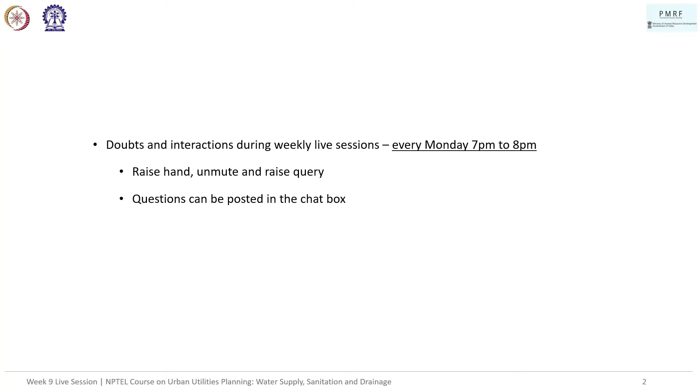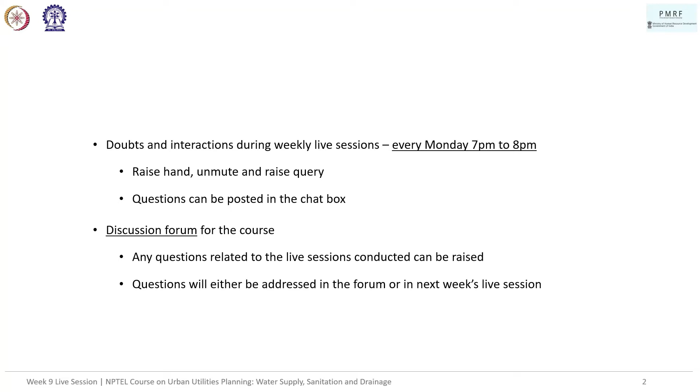In this course, we essentially have two means of interaction. One is the doubt clearing session, as well as problem solving session, every Monday, 7 p.m. to 8 p.m. Essentially, we look at the solutions for a few problems, and once each problem has been discussed, you can raise your hand, unmute, and raise your query. Questions can also be posted in the chat box. We also have a discussion forum for the course. Any questions related to the live session, also related to the general lectures, can be raised there. They'll be answered in due course of time.

So, week 9 majorly delved into sewer design, and a short recap. The first lecture dealt with the design of sewers. Next two lectures dealt with runoff estimation, and the last two lectures of the week with sewerage network design. So essentially, we saw that sewer design depends on both sewage output from households, as well as stormwater runoff, especially in case of combined sewer systems. Which is why we are looking at runoff estimation as well.

In this live session, we'll be looking at a few of the assignment questions from the previous run of the course. There'll be both theoretical and numerical questions. One of the numericals has a slight discrepancy from what was taught and what has been presented. So, right now, I will be presenting the solution that has been suggested by the NPTEL team. However, for that particular numerical, I will either get back to you in the next live session on whether the answer suggested by them is correct or faulty, or there might be a post in the discussion forum regarding the same. Right. So let's move into the lectures.

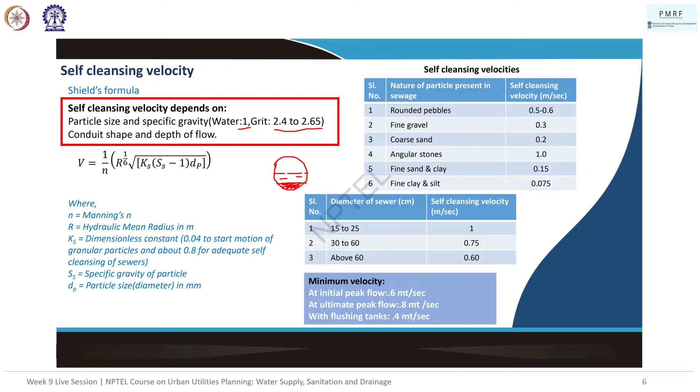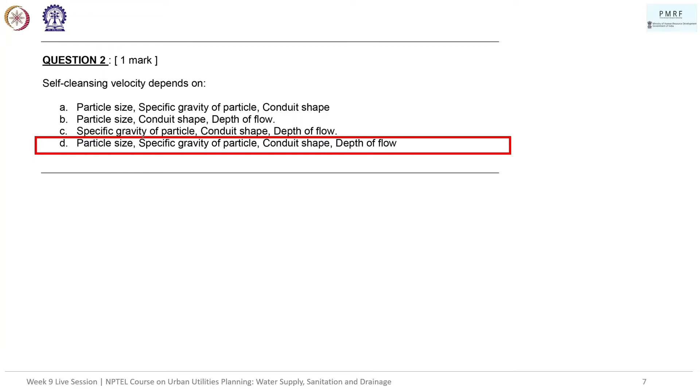Conduit shape, essentially, the cross section comes into play, right? And the depth of flow. So how much water typically flows through the sewer is also important for calculating this value, right? So the answer is D. Moving on to the next question.

So this is a numerical problem. Consider the following data of sewer. The sewer is laid at 1 in 600 slope. The diameter of the sewer is 150 centimeters. Assume n is equal to 0.015 in Manning's formula, and that the sewer is running half full. First of all, I would like to note here, in all of our lectures, the slides have the small n, not capital N, just a small thing to note so that there is no confusion. And we are supposed to be answering the following questions based on the above data.

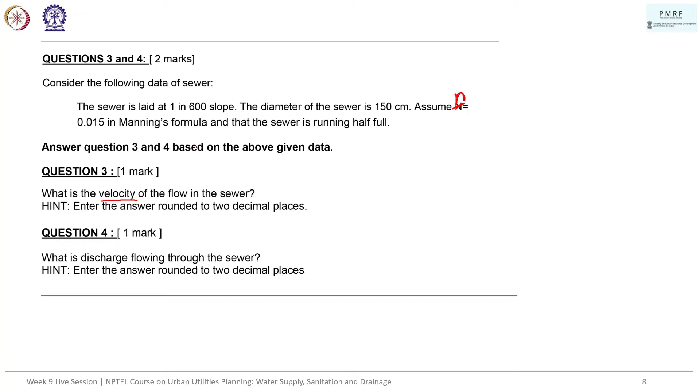So we'll be needing three values. Okay, we have one answer, 1.4. We'll work out the problem, Mr. Rahul. We'll see what the answer comes out to be. And thank you for working on it.

So n is the Manning's coefficient, or the Manning's rugosity coefficient. R is the hydraulic radius, or the hydraulic mean depth of pipe in meters. If you remember, hydraulic mean depth is the area of flow. So if this is a pipe, and this is the water flowing, right? This is the wetted perimeter, right? And this area is the area of flow, as in how much of the pipe is covered cross-sectionally when there is sewage flowing through. So the hydraulic radius or hydraulic mean depth of pipe is essentially this area of flow divided by the wetted perimeter. So it's wetted. I've seen a few students take it as weighted perimeter, which is why I'm stressing that how much of the perimeter gets wet is the basis, right?

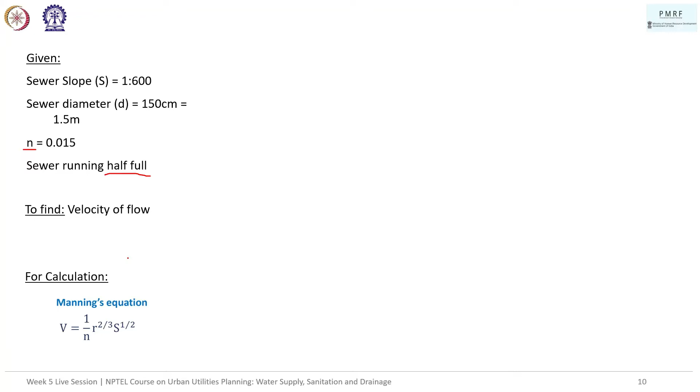So what are we given? We're given that the sewer slope is 1 is to 600, which will be taken up as 1 divided by 600. Sewer diameter is 150 centimeters, which is equal to 1.5 meters. N value, as I had said, we are going to take as small n, because that's what's given in the lecture, is 0.015, and the sewer is running half full. Right, what are we supposed to find? We are supposed to be finding the velocity of flow, and we'll be using Manning's equation for calculation. So the solution is pretty straightforward.

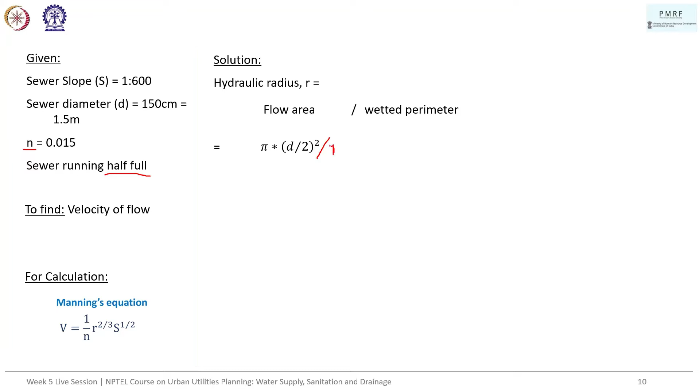We first calculate the hydraulic radius, which is equal to flow area divided by wetted perimeter, right? So the flow area is, since it's half, actually there has to be another half here. Half of the circle is being used, so we'll be using, sorry, that is missing here, and divided by the wetted perimeter. The wetted perimeter is taken as half. So usually the perimeter of a circle is 2 pi r, right? But we are taking here pi r, r is equal to d by 2, right? And since half the sewer pipe is full, we'll be taking half of the flow area. So simplifying this, the answer comes out to be d by 2, right? And the answer is 0.75, if I'm not wrong.

So let's substitute the values in Manning's equation. It turns out to be 1 divided by n into R power 2 by 3 and S power 1 by 2. And substituting the values, n is 0.015 as given in the question. R is 0.75 to the power 2 by 3 and S is 1 divided by 600 power 1 by 2. The answer actually comes out to be 2.25 meters per second. Now that I think about it, I have a suspicion that they probably did not take this divided by 2 into consideration. So these are solutions provided by the NPTEL team, right?

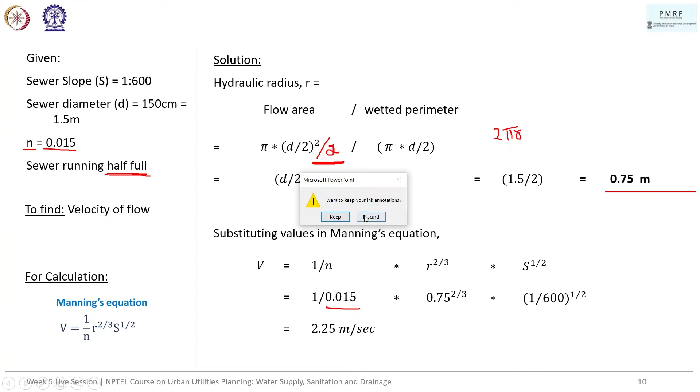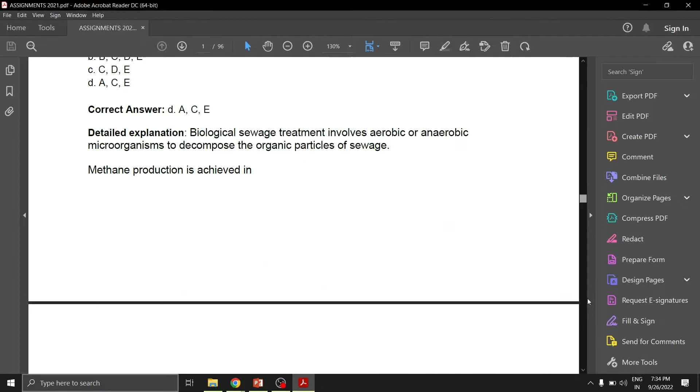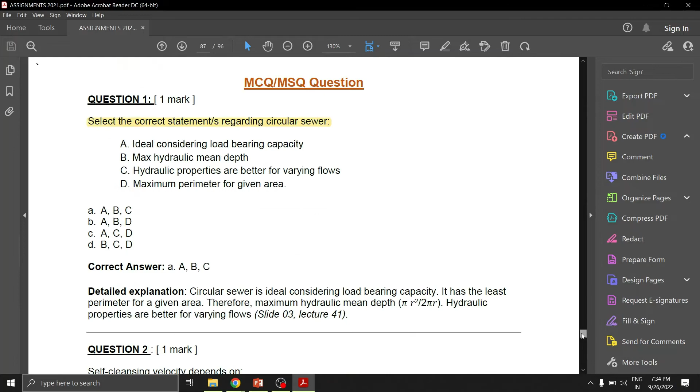So, yes, ma'am. Actually, hydraulic radius is d by 4, right? Yeah, I'm wondering. One second. Could you please check? I'll just check the previous year's solutions. Even from lectures, you can find. I told you that it's supposed to be d by 4, which is why I'm wondering if they've given the right answer. Okay. One second.

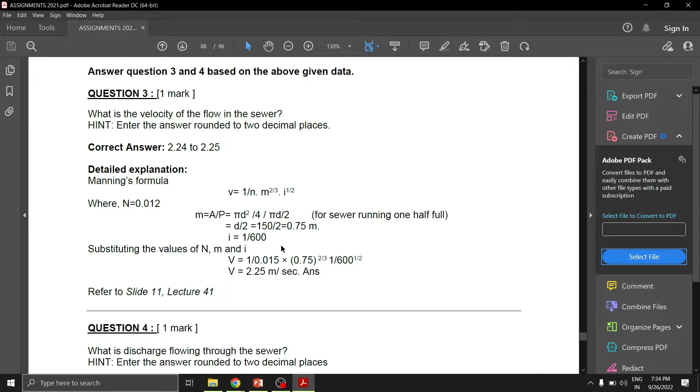It's actually d by 4. They've made a mistake, right? So, which means the answer here will also be different. Let's directly calculate instead of me taking the answers from them. So here it will be another divided by 2, right? Because this is the area pi r square divided by 2. So we'll have d by 8 and here d by 2, so it will be d by 4. Which means our radius will also subsequently change, right? So 1.5 divided by 4 gives us 0.375. So substituting this value and not the former value, right?

So actually, let me do it in Excel. It's easier for me as well. It's 1 divided by 0.015, then 0.375 to the power 2 by 3.

And this is 1 divided by 600 to the power 1/2, right? And we shall be multiplying. Yes, so the answer is actually 1.4153. Yes, so Mr. Rahul, you are correct, and I guess I'll have to let the NPTEL team know, right? So that will be our answer.

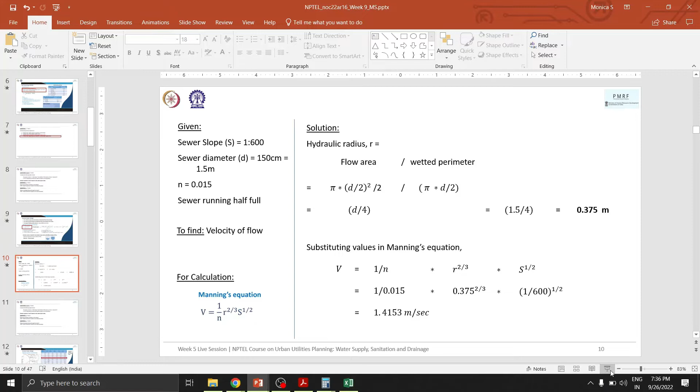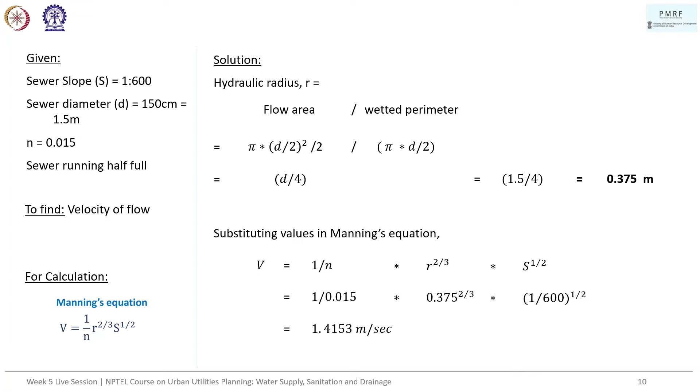Is this all right now, ma'am? Yeah. Okay. I have not checked the solution, but process-wise, this has to be the answer, and I'm glad that Mr. Rahul also has the same answer. At least the process is right. This is the hydraulic radius. It's not d by 2. So I'll request the NPTEL team to also change it in the original solution provided.

Alright? So moving on to the second, what is the discharge flowing through the sewers? We'll have to again probably modify it. When we are taking the discharge through the sewers, because the flow is half, we can't directly assume that it's half. Matlab, if the flow is say 3/4 of the sewer, we can't assume that the flow will actually be 3/4 of the value of the total flow, right? If you remember, proportionate discharge could be higher and velocity could be higher than the velocity at full flow, which is why here we are just cross checking for the halfway point. It so happens to be half, right? When the sewer is half full, the proportion is also half of the flow, right?

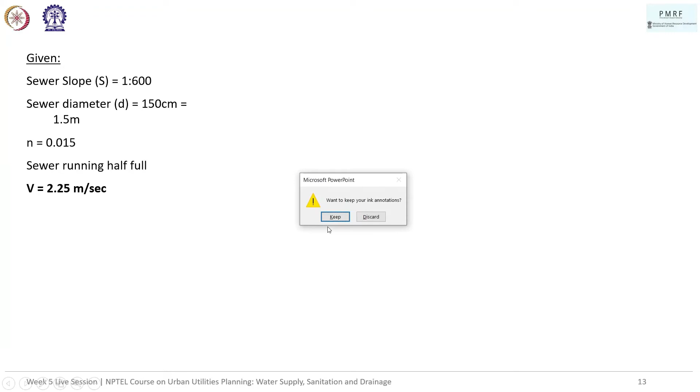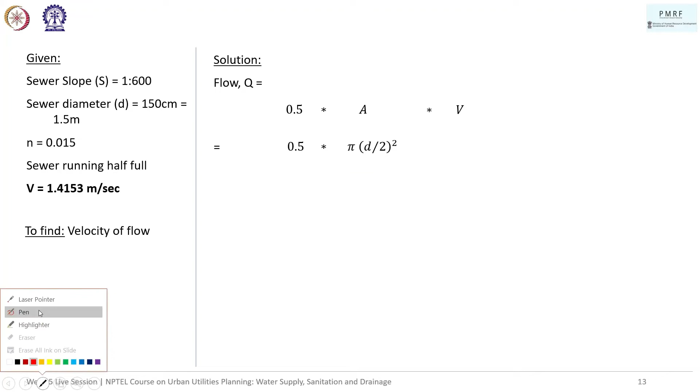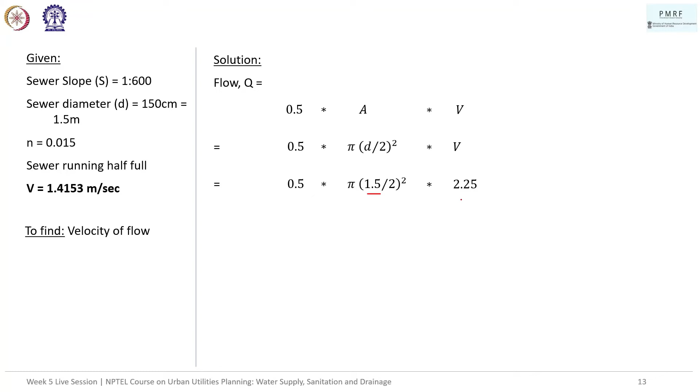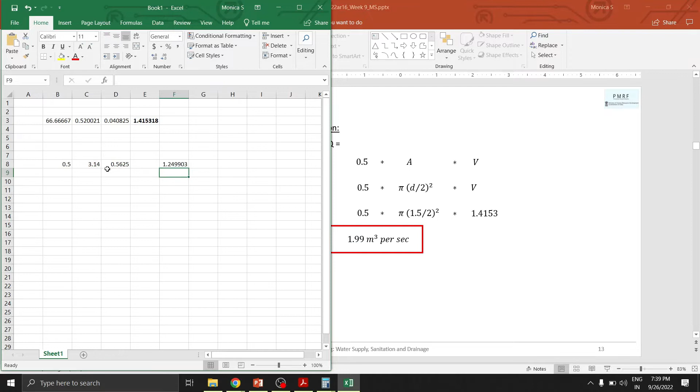Therefore, here again it is 1.4153 if I'm not wrong. Right, the calculation will vary. Let's solve it together. So the flow will be 0.5 times A into V. So that will be 0.5 times pi d by 2 square into V. So there will be 0.5 into the d is 1.5, but V value is 1.4153, right? So let's calculate this as well. So that will be 0.5 into 3.14 into 0.75 square into 1.4. So our answer will be 1.2499. So 1.25 essentially, not 1.99. Right. So I'll ask the team as well to modify the solution.

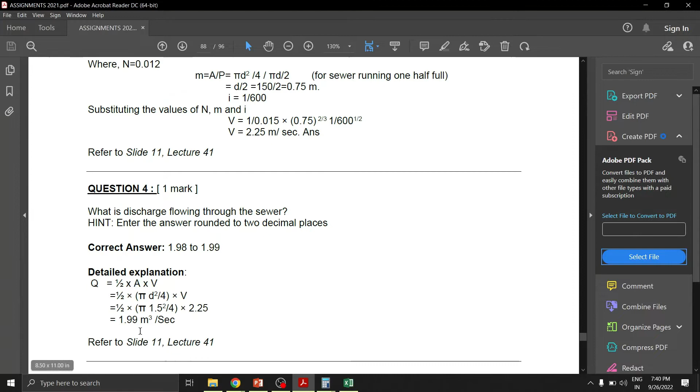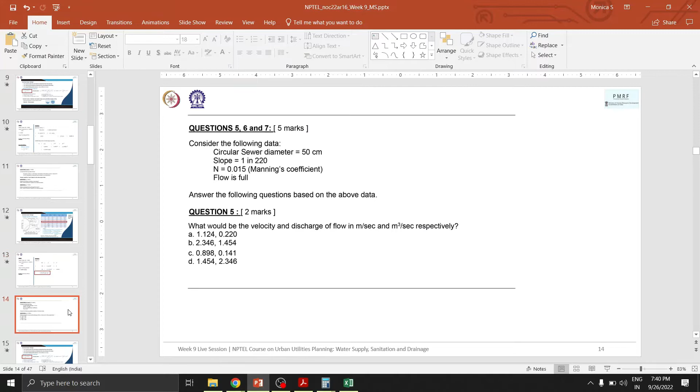So these are the two values, right? The original solution that has been suggested is 1.99, but that's not the answer. Please take note of this. Any queries in the formula or anything? No. All right, it's a straightforward substitution, except the wetted perimeter calculation was wrong here. I'm sorry about that. So moving on to the next question.

This is again a set of numericals based on the values given. Right. So consider the following data. Circular sewer diameter is 50 centimeters. Slope is 1 in 220. So that is 1 is to 220, or 1 divided by 220. And the n value, again, it's given as capital N, whereas all our formulae use small n. Please be mindful. Which is the Manning's coefficient is 0.015, and the flow is considered to be full this time, right? So, and we're supposed to be solving three questions based on this data.

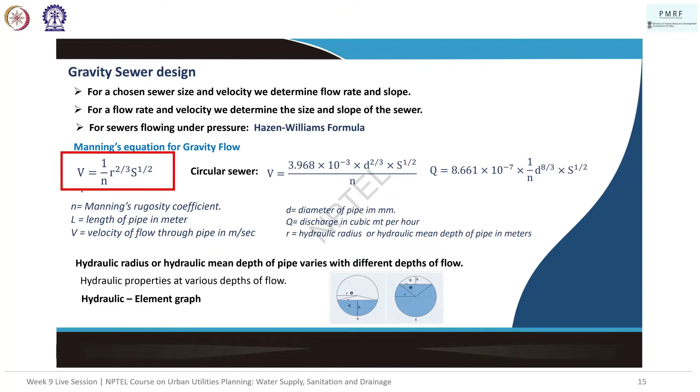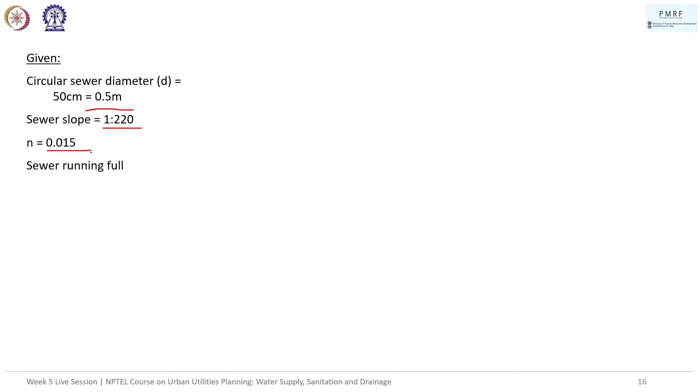First question is, what would be the velocity and discharge of flow in meter per second and meter cube per second respectively. So this is again using the same process. We'll be using Manning's equation for gravity flow, right? So this is a given data. We have a diameter of 0.5 meters, sewer slope is 1 is to 220, n is 0.015, and sewer is running full. We need to find the velocity and discharge of full flow, right? So using the same process that we used before, this time I guess the area will be correct, right? So here it's pi r square, and divided by wetted perimeter is 2 into pi into d by 2.

So however again d by 4, yeah, here the hydraulic radius is d by 4, right? So thus the diameter given is 0.5 meters divided by 4, and that gives us a hydraulic radius of 0.125 meters, right? So now substitute the value in Manning's equation. That gives us 1 by n into r power 2 by 3 into s power 1 by 2. So the n value we substitute 0.015 into r value is 0.125 as we have just calculated, and s value is 1 by 220, and the answer turns out to be 1.124 meters per second. I'll just check now that the answers seem to be very shaky.

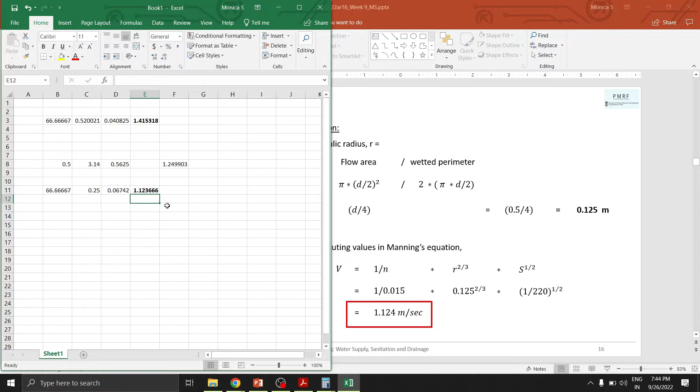So 1 divided by 0.015, this is 0.125 to the power 2 by 3, and 1 by 220 to the power. Then we multiply all of this. So the answer comes out to be 1.1236. Mr. Rahul, I don't know which value is differing for you.

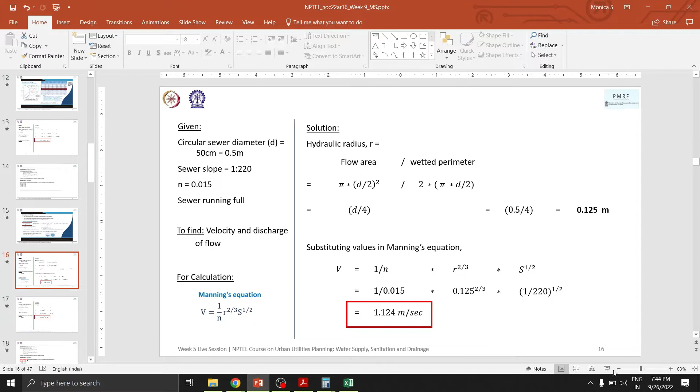You've gotten 1.116, right? Please check, and if there is a discrepancy, please let me know. Okay, decimal rounding. That's fine. Usually, even for examinations, we try to keep the intermediate values to 4 decimal points, and then round off the final value, if needed. So just keep that in mind. It shouldn't be such a big deal.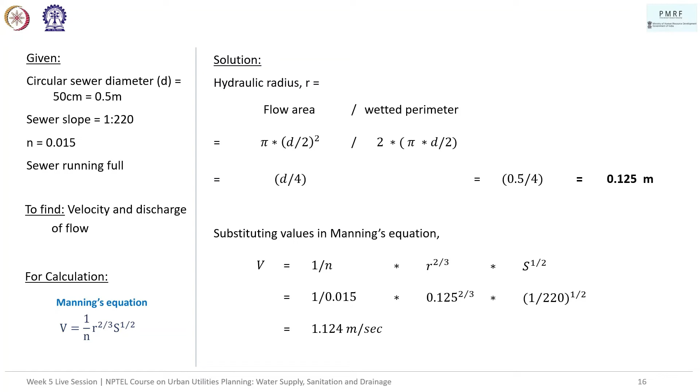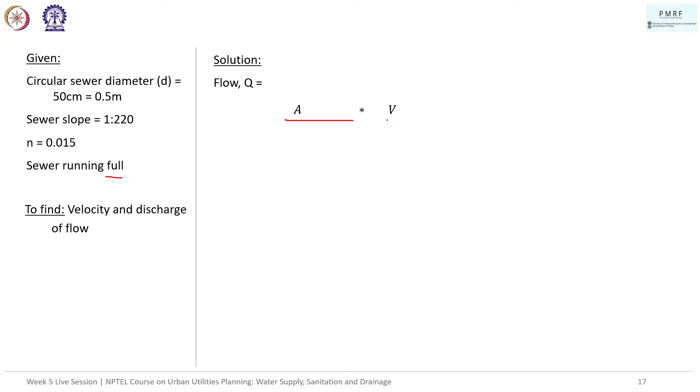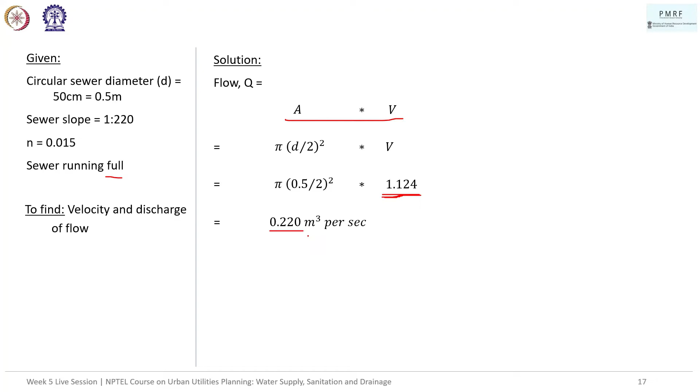So this is our answer for V, and for Q, again A into V. Since the sewer is running full, we are taking the formula for full flow, full discharge. So the area is pi times (d by 2) squared, and into V. Using the answer we got in the previous step, it turns out to be 0.22 meter cube per second. So that's our answer.

I guess you would have also selected this answer, Mr. Rahul, because it's the closest value possible. All right, so that's the solution for the first question. Here we had the value for the flow being full. However, the next question asks what would be the velocity and discharge when the same is flowing at 0.3 of its full depth.

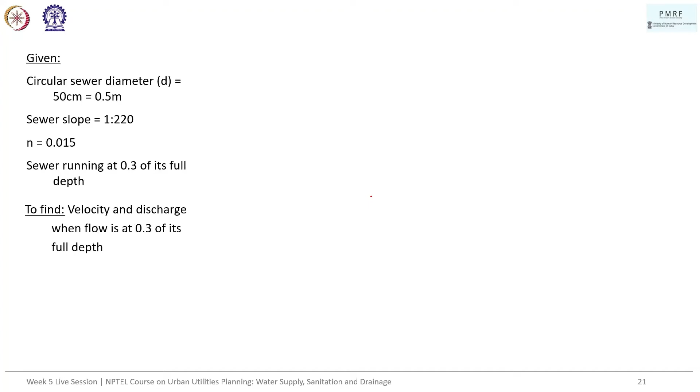Now we look at this chart and we realize that the proportionate depth we are talking about is 0.3 of full flow. So in order to calculate the velocity and the discharge, we'll be using the proportionate velocity and proportionate discharge. These are the values given, and we'll be using the values from the table. The solution: proportionate velocity is for small v, for 0.3 flow, and this is for full flow. The given number is 0.776.

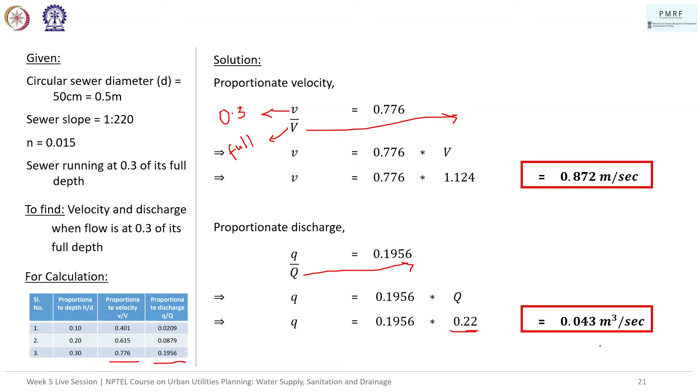That implies we cross multiply. So small v is equal to 0.776 into capital V, which is 0.776 into 1.124. Yes, Mr. Rahul, v by V is 0.776. So the answer turns out to be 0.872. Similarly, for proportionate discharge, q by Q is equal to 0.1956, which is again given in the table. Then we cross multiply, taking the Q value as 0.22 from the previous calculation, and the answer is 0.043 meter cube per second. The solution is B.

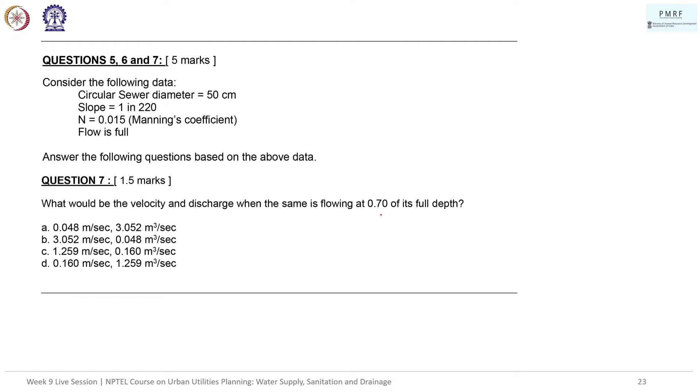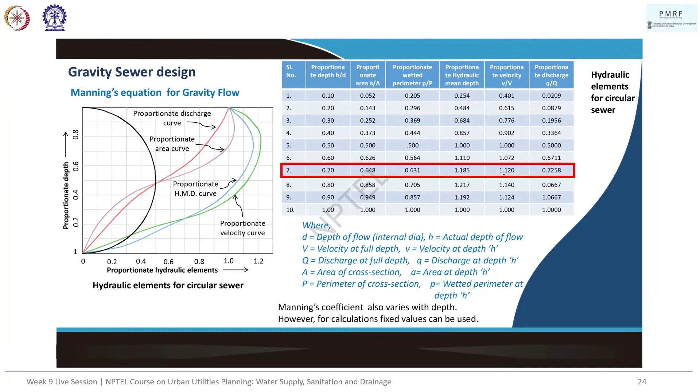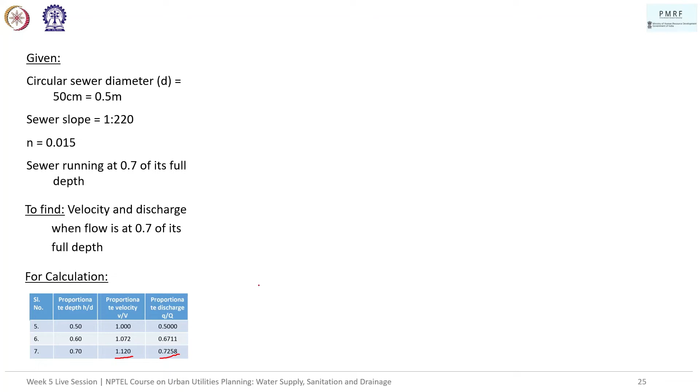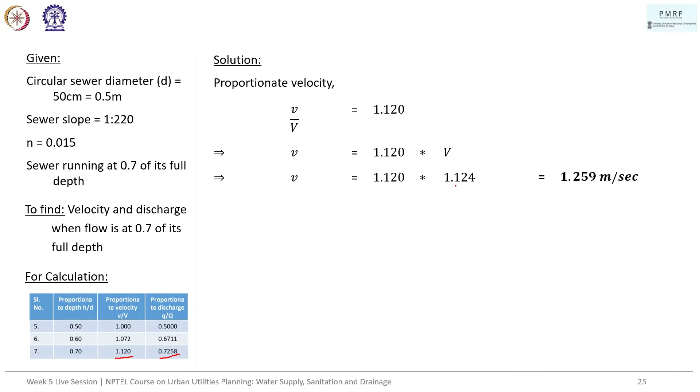Similarly, when we look at the flow at 0.7 of full depth, we take the values for 0.7 of the proportionate depth. The values turn out to be 1.12 for v by V and 0.7258 for q by Q. These values are usually given. In proportionate velocity, we do the same thing. v by V is 1.12, so v is equal to 1.12 into capital V. The capital V we had calculated to be 1.124, and the answer turns out to be 1.259.

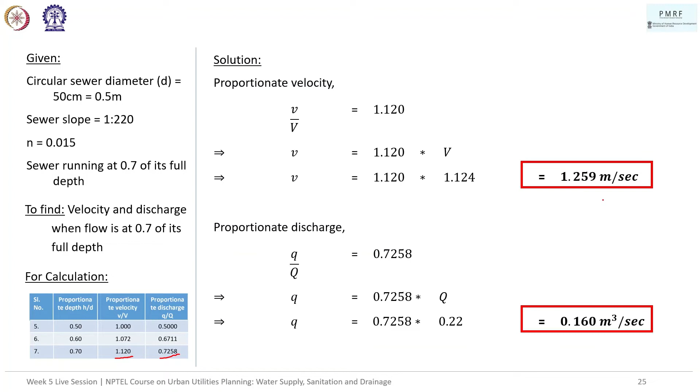For proportionate discharge again, q by Q is equal to 0.7258. So q is equal to 0.7258 into capital Q, and that turns out to be 0.160 meter cube per second. So our answer is C. Any queries in this numerical? No. All right, let's move on then.

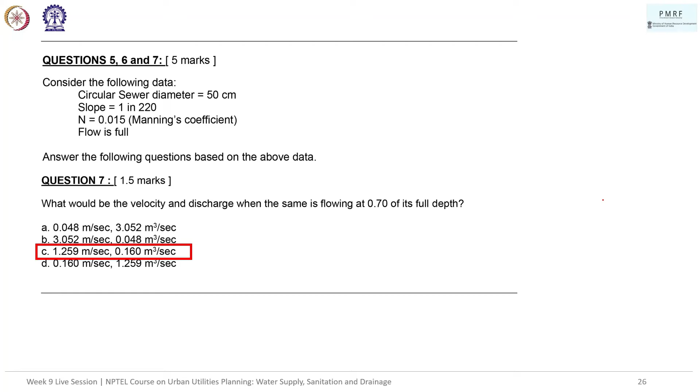Going on to a theoretical question. The dash of a storm event may be defined as the average recurrence interval between events equal to or exceeding a specified magnitude. So, any answers? The average recurrence interval between events equal to or exceeding a specified magnitude.

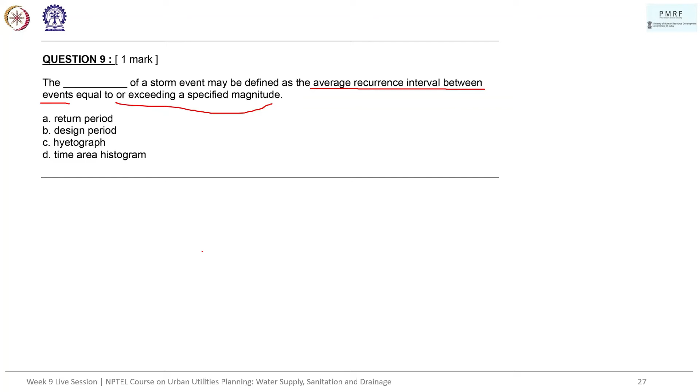So if we look at the slides, this is for the return period selection as has been mentioned in the CPHEEO manual 2019, right? So that's a direct answer from the slide. So the answer is return period. The return period of a storm event may be defined as the average recurrence interval between events, which is equal to or exceeding a specified magnitude.

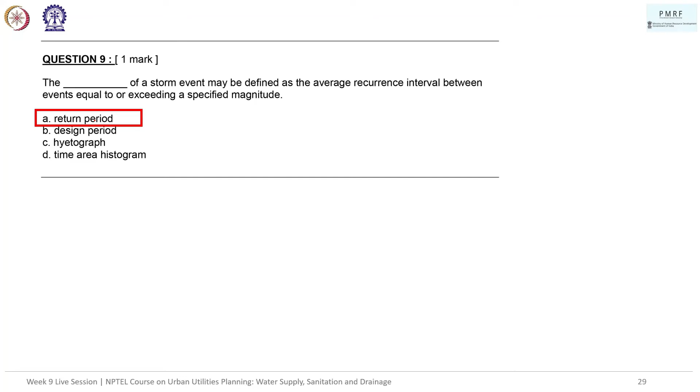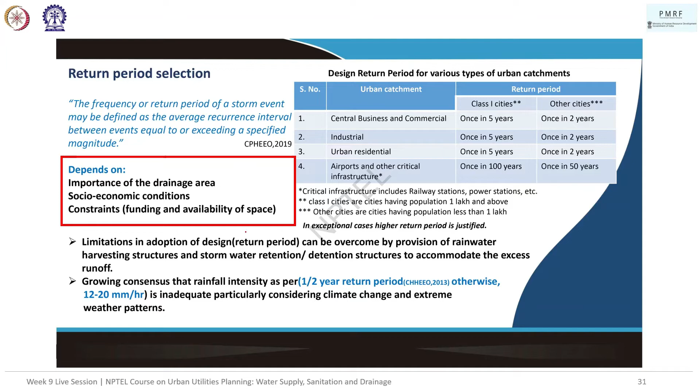Alright. So the next question. Return period selection of a storm depends on A. Importance of the drainage area, B. Socioeconomic conditions, C. Constraints, that is funding and availability of space, and D. Design period of infrastructure. This answer is again in the same slide actually. So this value depends on the importance of the drainage area, socioeconomic conditions, and constraints of funding and availability of space. Right? So again, a very direct answer. The answer is A.

Because essentially design period of infrastructure is not really going to influence the occurrence of a storm, right? The storm will occur. The infrastructure might influence how we respond to the storm or how much damage happens, right? Moving on to the next question.

So we essentially have a match the following. For inlet time, time of travel, time of concentration, and partial area effect. Any answers for inlet time or the overall answer also? Okay, let's just go on and take a look at the slides. So we first look at the time of concentration. The time of concentration has been specified as the time required for water to travel from the furthest point in the total catchment to the point of consideration, right?

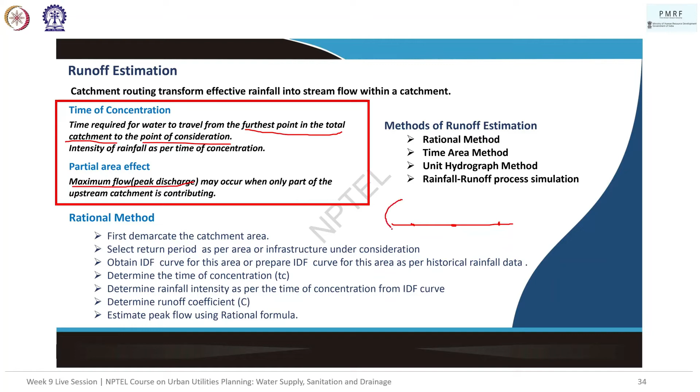So whenever there is a catchment area and there are points of inlet, right? So say this is the entire watershed and the topography permits all the water here to enter this inlet, all the water here to enter this inlet, and all the water here to enter this inlet. So we might expect, okay, for this point we'll also have water coming in through the pipe, and at this point all of the water, which is essentially all of the water from this entire catchment area, will be going through here, right? Usually we'll expect this value to be bigger than this value. However, partial area effect might result in this value being bigger than the whole catchment area. It depends on permeability and

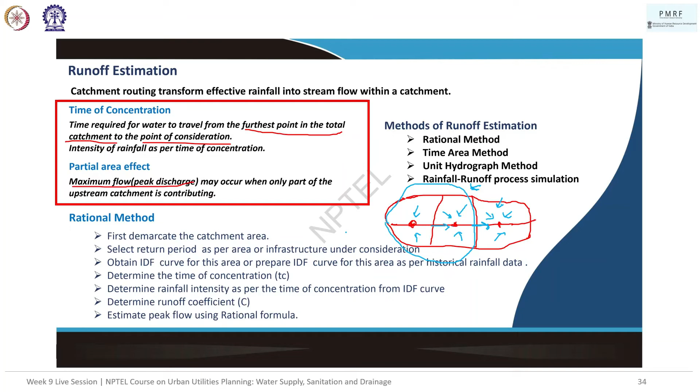etc. Right? So the next one is inlet time or surface or overland flow time, which is the time required for the rain falling on the most remote point of the tributary or catchment area to flow across the ground surface along drains or gutter to inlet of sewer. Right? And the time of travel is the time required by storm water in traveling from the uppermost inlet up to the point of concentration. So there we go. Our answer will be A. So inlet time is the time required by runoff from the most remote point to inlet of sewer, right? So Q will be 1.

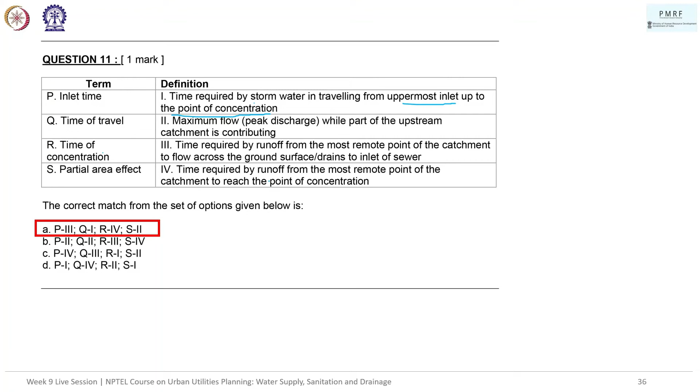Time required by storm water in traveling from uppermost inlet up to the point of concentration. Time of travel is 4. Time required by runoff from the most remote point of the catchment to reach the point of concentration is time of concentration. And partial area effect, as we said, is maximum flow while part of the upstream catchment is contributing. Any questions here? These are all definitions that need to be remembered for your exam as well. These are basic concepts that you need to know, right? Alright, moving on to the next question.

Runoff entering into the sewer depends on A. Imperviousness of the catchment, B. Shape of the drainage area, C. Duration of storm, and D. Specific yield. Any answers? We have one A. The answer is actually

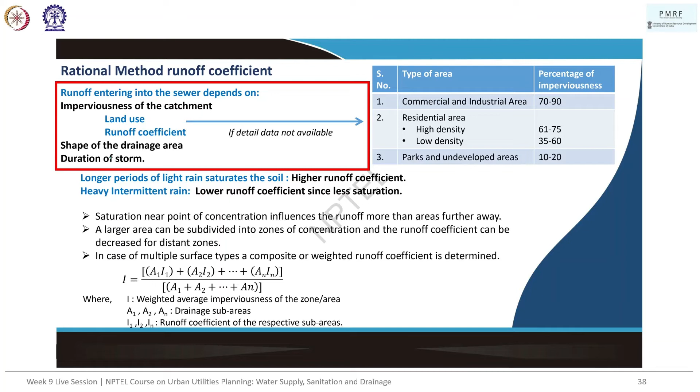Right. So we have this again directly from the lecture contents. Within the imperviousness of the catchment area, essentially these are influential points, right? You also have shape of the drainage area and duration of storm. So the answer is A. Specific yield does not really determine the runoff entering into a sewer. Right? So let's move on to the numerical. Any doubts till now? I hope not. These are all theoretical questions directly from the lecture, right?

Okay, so moving on to the last numerical. Here actually, this is the question that I was talking about, that there is a discrepancy. It looks like this is the second question where we have a discrepancy for the evening. So, determine the minimum required diameter of a circular sewer making use of the following data. Area to be served is 120 hectares. So that will be 120 into 10^4 meter square, right? Hectares to meter square. So 1 hectare is equal to 10,000 meter square. Just remember this always.

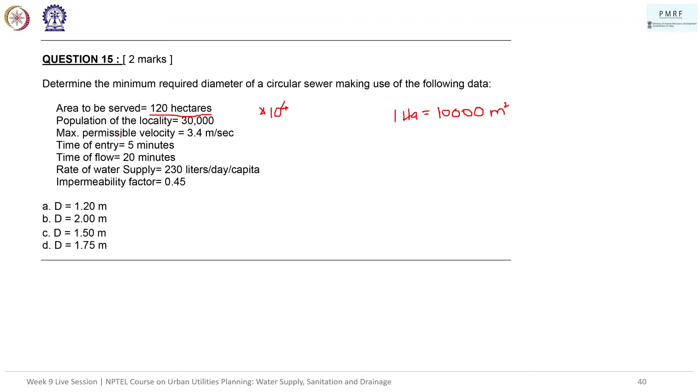Pardon my bad handwriting. The population of the locality is 30,000. Maximum permissible velocity is 3.4 meters per second. Time of entry is 5 minutes and time of flow is 20 minutes. The rate of water supply in the area is 230 liters per day per capita, so LPCD. And the impermeability factor is 0.45, right?

So one thing that we need to remember here is the time of concentration is equal to inlet time plus time of travel in the drainage system, that is time of flow. So if you look at the question, they have given it as time of flow, right?

I'm sorry about that, just ignore it. I hope you understand that's a mistake.

So these are the givens, and we need to find the minimum required diameter of the sewer, right? So for intensity calculation, we'll be using the empirical formula for rainfall intensity. First of all, let's calculate the quantity of water supply. That will include population times rate of water supply, right? So how much population is there, and the rate of water supply is given per capita.

So that will be 30,000 into 230. 230 is for the entire day, which means our calculation will be looking at per second. So therefore we divide it by 24 into 60 into 60. So this is the LPCD, and this is to convert it to per second. So the answer apparently comes down to be 133.10. Let's check that as well.

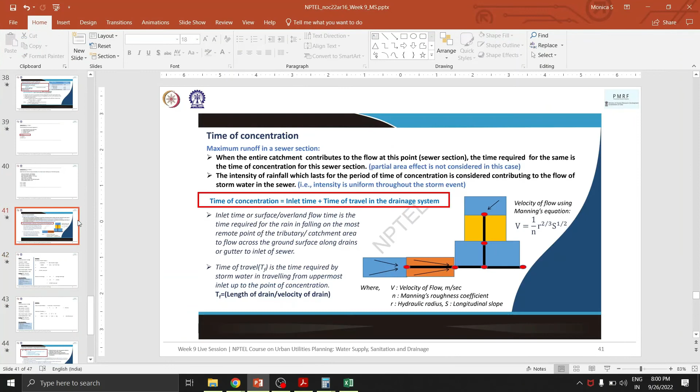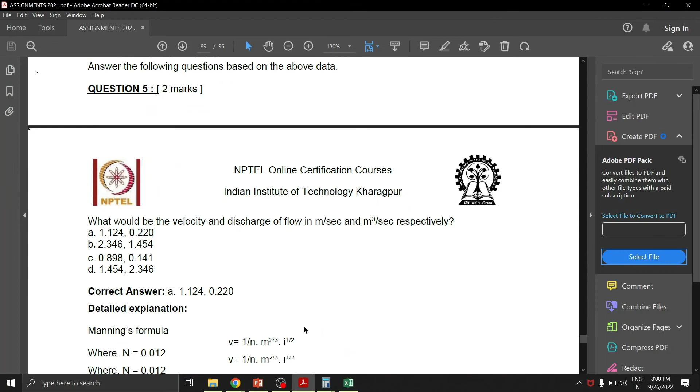So we have 30,000 into 230 divided by 24 into 60 into 60. So there is a small error here as well. Or am I reading the question wrong? Okay, so there is a minor error here also. I think there was an issue in translating between the original question and the modified question. So the answer is actually 79.8611.

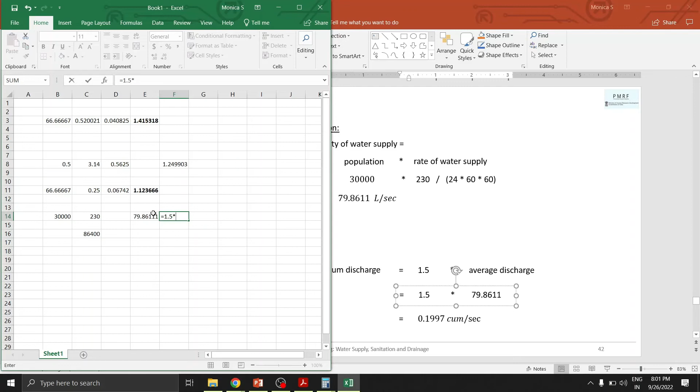Let's just do this calculation, right? So then we have maximum discharge, which is usually 1.5 times the average discharge. So we always design the sewerage network not for the average flow, but for the maximum flow, right? So we take 1.5 into 79.8611, which turns out to be 119.7917

liters per second, right? And in order to convert this into cubic meters, we need to divide it by 1000. So that makes it 0.1197917 cubic meters per second, right? So that's our calculation of maximum discharge.

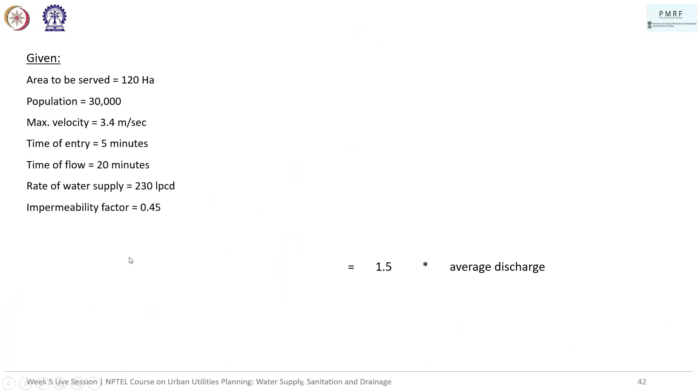But why are we calculating maximum discharge? Essentially because this flow almost completely will end up being calculated as the sewage from the households, right? The input from the households and all the houses into the sewerage network. So this is our sort of proxy for the amount of sewage coming out of the households, right?

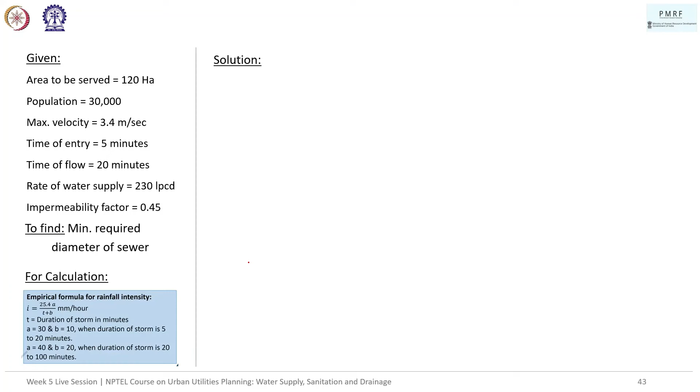So now we calculate the intensity of rainfall. For that, we need to take the time of concentration, which will be inlet time plus time of travel. If you remember from the lecture slide, right? Time of entry is 5 minutes, and time of flow is 20 minutes, right? So that turns out to be 25 minutes. So thus we use the empirical formula for rainfall intensity, which is this one, right? I is equal to 25.4 into A divided by T plus B.

So here A and B are coefficients that are built into the empirical formula, and T is the time of concentration, which we get from this calculation, right? So right now we see that the time of concentration is 25 minutes. A and B's values vary when the duration varies. So for right now we have 25 minutes, which is more than 20 minutes, right? When the duration of storm is 20 minutes to 100 minutes, the value of A is 40 and B is 20. So we substitute these values.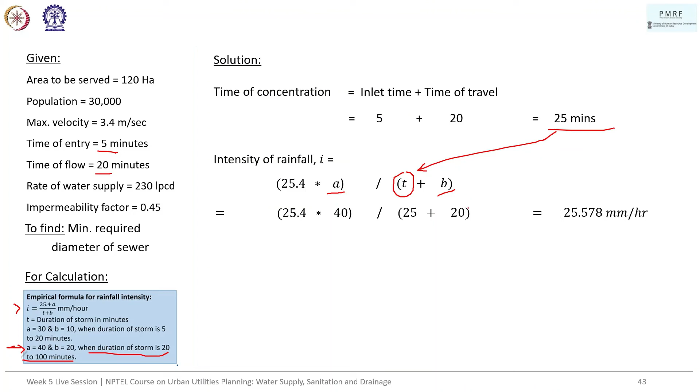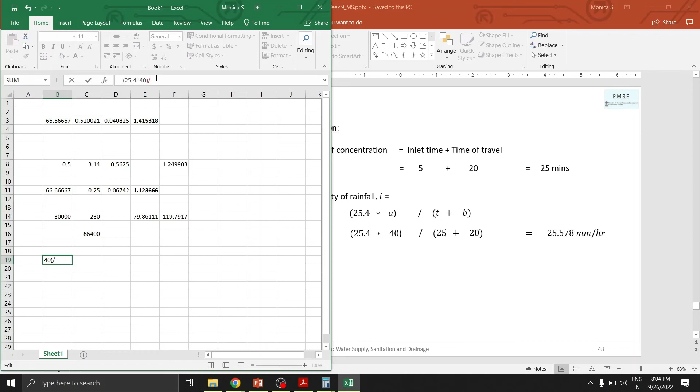So we equate A to 40, T is 25 and B is 20, which hopefully turns out to be 22.578. So it's 25.4 into 40 divided by 45. So yes, 22.578.

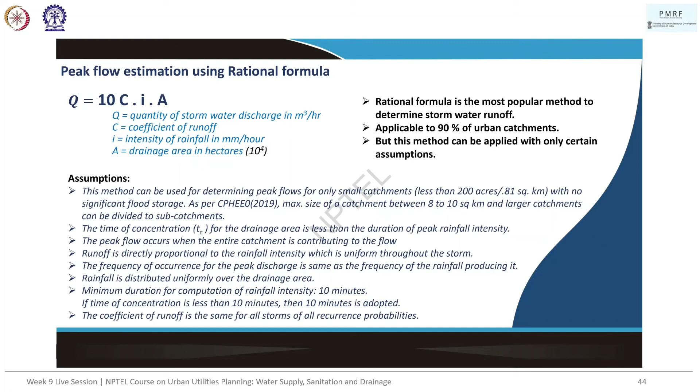Next, the peak flow estimation, we usually use Q is equal to 10 into C into I, right? However, the original rational formula is CIA divided by 360, and they have used this formula. I'm not sure as to why there is a digression. So we usually use this for stormwater calculation, right?

However, I'm going to go ahead and retain this calculation, right? So here what they've done is Q is equal to C into I into A divided by 360. That's the original rational formula. So that turns out to be 0.545. It shouldn't technically vary so much, but let's see. So 0.45 is the C value, the impermeability factor given, and 22.578 is the I that we just calculated, right?

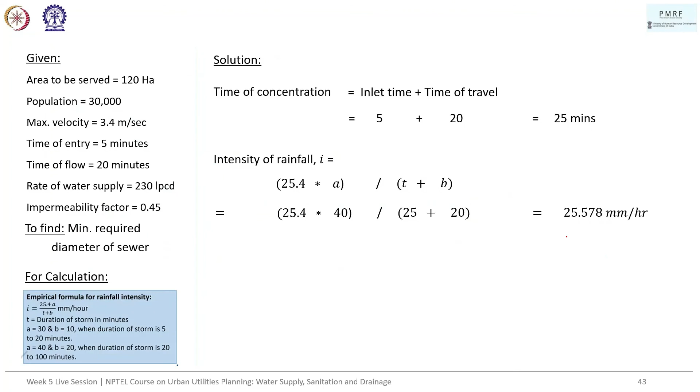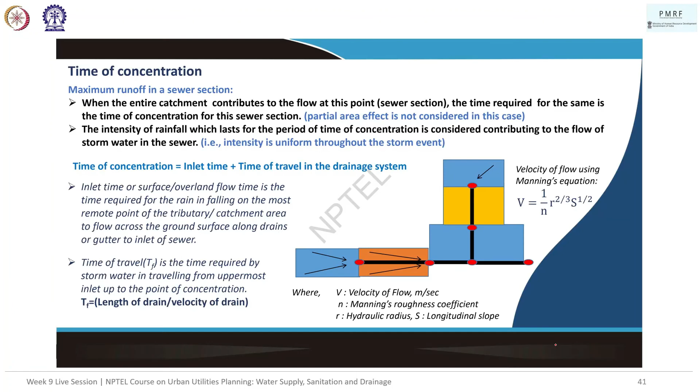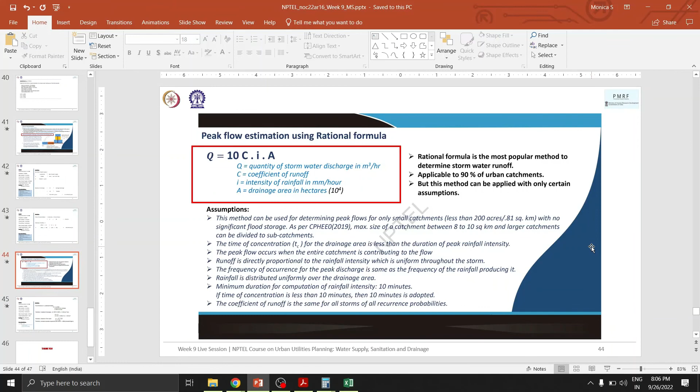So we basically take combined discharge to be 0.1997, which is the value from the... one second, just Google... which is this value for us. 1179 is what we are getting, right? And 25.578 is what we are getting. So using that, the value will vary largely, but I'm going to stick here. So originally what we do is we get the discharge from the rational formula as well as the discharge from the quantity of water supply, which is the sewage discharge. So this is sewage and this is storm water, right?

Then we use Q is equal to A into V, and the area of the sewer will be discharge divided by velocity. Velocity will be limited by the maximum velocity permissible in the sewer, right? So that's 1.055. So the diameter of the sewer turns out to be, calculating back from the area, 1.16 meters.

And Mr. Rahul has sort of gotten almost the same, right? But there seems to be a discrepancy between what has been calculated by Sir and what has been suggested by the team. I'll get back to them and I'll resolve this issue and post the final solution in the discussion forum. Please pardon this discrepancy. At least I will be explaining as to why two different formulae have been used. But that being said, that's the answer for the question, right? Any major doubts apart from this issue in the solution?

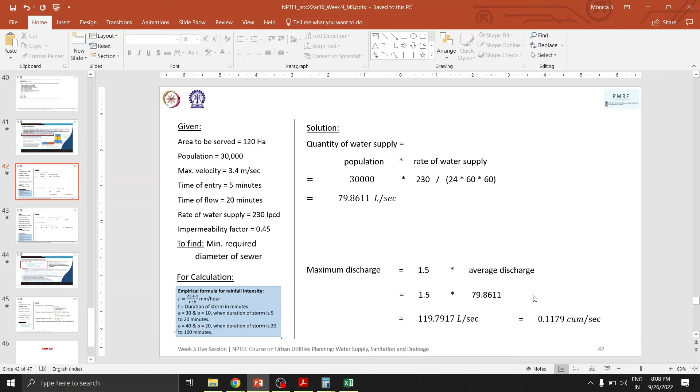Both formulae are getting the same answer, but if you remember there was a mention that we usually use the 10 into CIA. So I'm not able to figure out where the difference is. That is why I'm saying I'll end up getting the answer from the team and I'll post it. But yes, both ways you will end up getting an answer close to 1.2 meters, right? This is similar to the population projections where we take the initial value and then there is another value. So please pardon the small confusion, but the process will be the same.

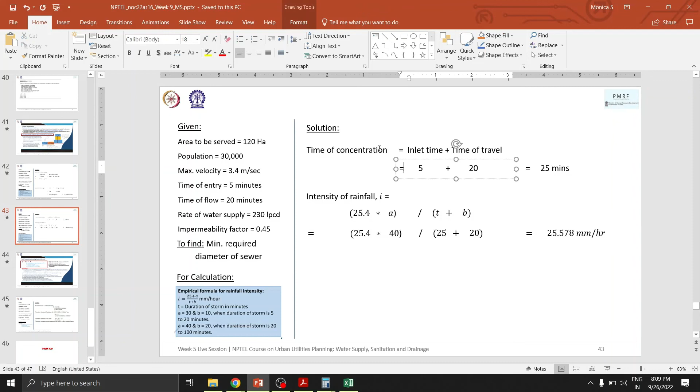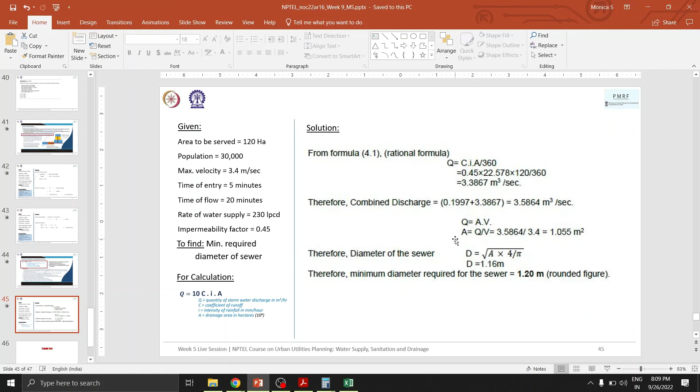We'll then be calculating stormwater by figuring out the time of concentration and the intensity of rainfall, and then we go for the rational formula. We get the combined discharge, which is sewage plus stormwater. We add the two values, and we take Q is equal to A into V, and then figure out the cross sectional area of the sewer, right? And from this we derive the diameter, which turns out to be 1.2 meters, right?

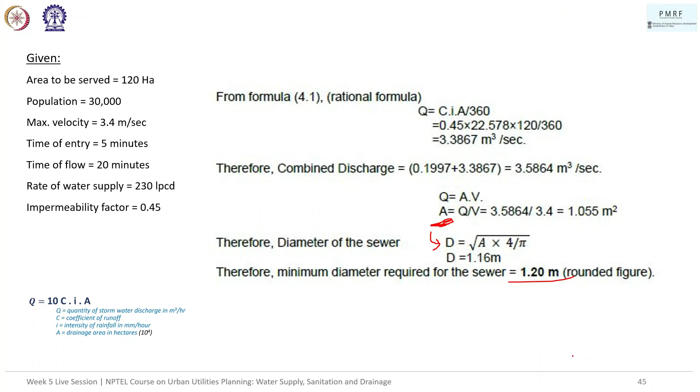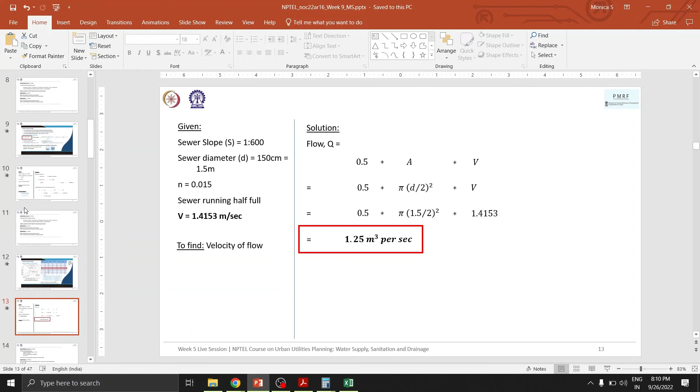All right. So if there are no questions, we are actually done for the day. For this first question I will post the modified answer as well, right?